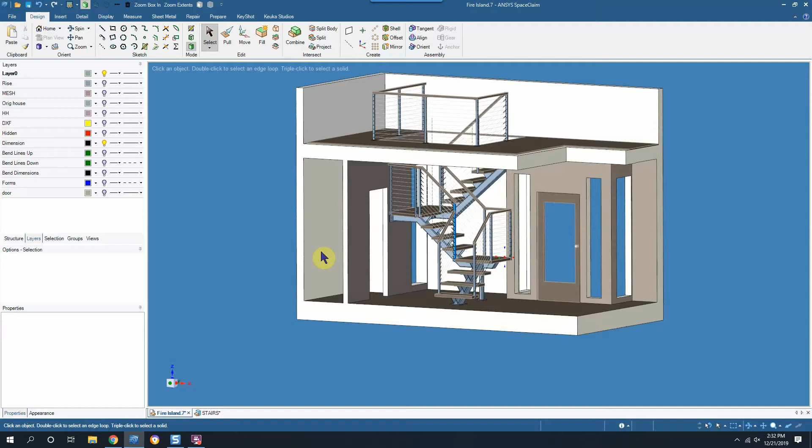Okay, this is a little quick fly through. I want to give you an overview of the stairs. I'll just start by flying around it a little bit. This is kind of what we would do if we did a real-time fly through, if that were able to pan out today.

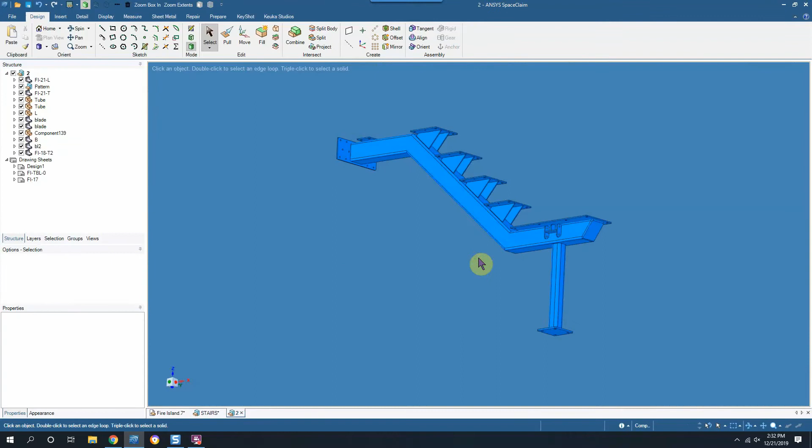So here's one of the main pieces. This will be like a welded unit. It's narrow enough to walk into the door. It probably weighs about 250 pounds. It's probably one of the heavier pieces.

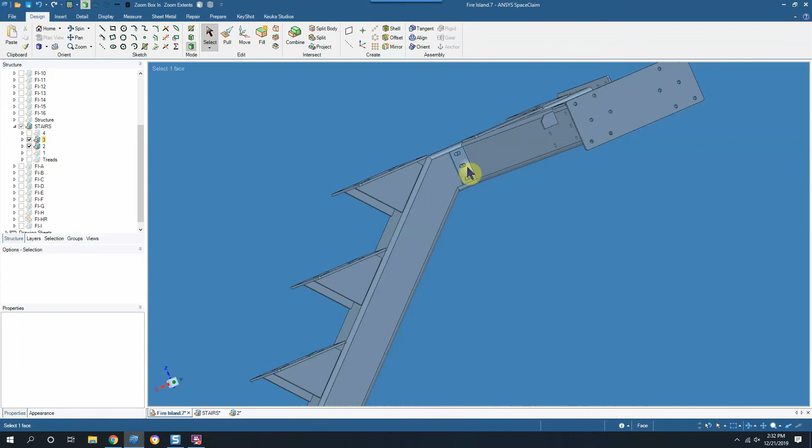Probably the first thing I would do is connect this cross arm here, and that bolts on with these little bolts right on this flange here. At least loosely connect that.

Then maybe connect this lower section here, which has some little tabs that this connects into, and there's a little hook on the top to line it up. Put the screws in there.

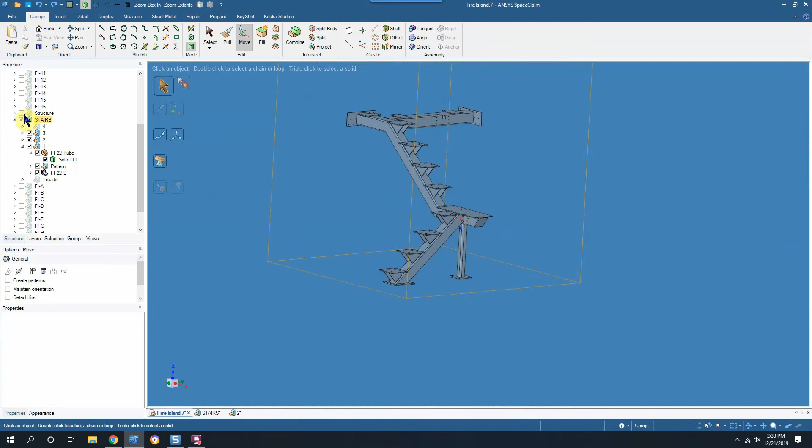Then you can probably set the thing up on the floor like this, lean it against this wall and this wall. We're going to talk about what you're going to put on this wall, because I've got this shown sunk into the wall a little bit right now, since Jeff mentioned that maybe that finished material was going to be removed, the shingles and something else put in, so I'll need to know what that thickness is.

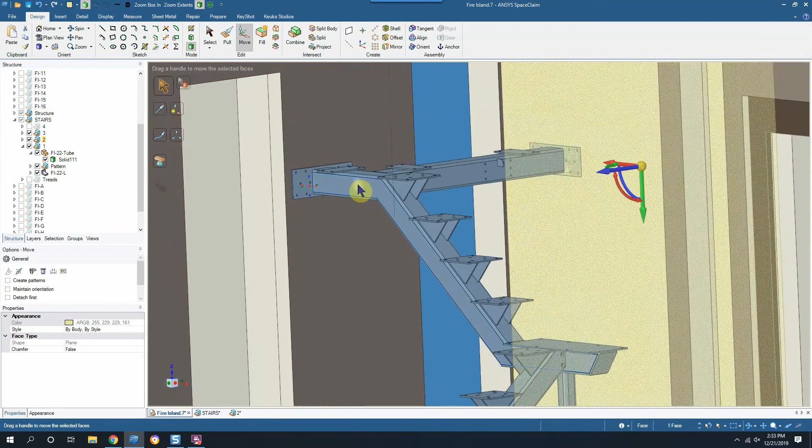Also going to assume that maybe you guys can put some blocking in wherever these plates mount to the wall, and some jack studs to help support the weight. But you could probably get this assembled to this point, maybe put a couple 2x4s underneath here, just to prop it up so it's sitting on the floor, but you still have a little room to move it around.

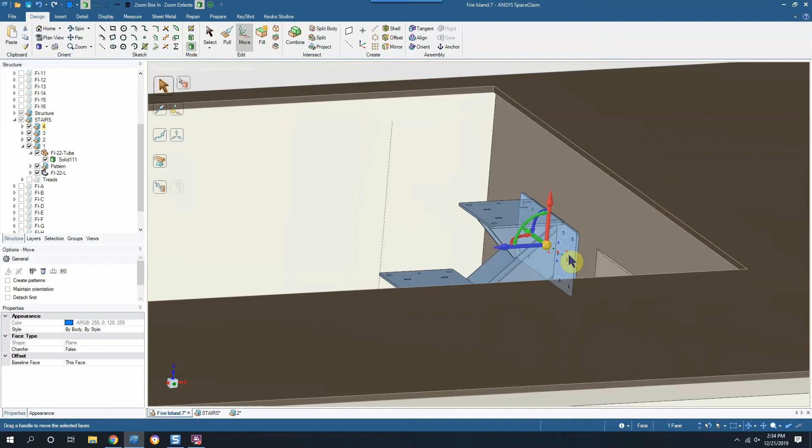And then this last piece up here is going to bolt into the front face of this wall. I'm a little concerned you've got a window here, and I don't know what kind of header there is there. If there's not a good header in there, then maybe this plate will have to be made bigger and have some holes mounted up here so we can pick up this ceiling joist running along here.

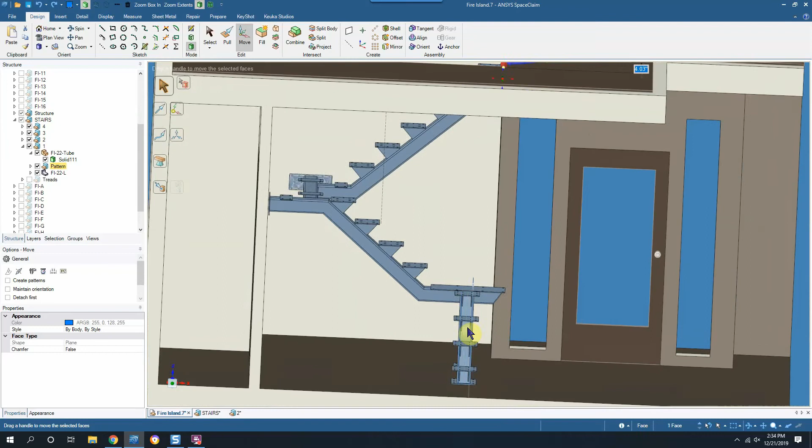Once you get it all in place and level everything up, then you can just lock it down and start adding the treads.

The treads will come up with little holes already in them, so you can just, and they'll be numbered so that you can screw them into the plates on the bottom of the stairs.

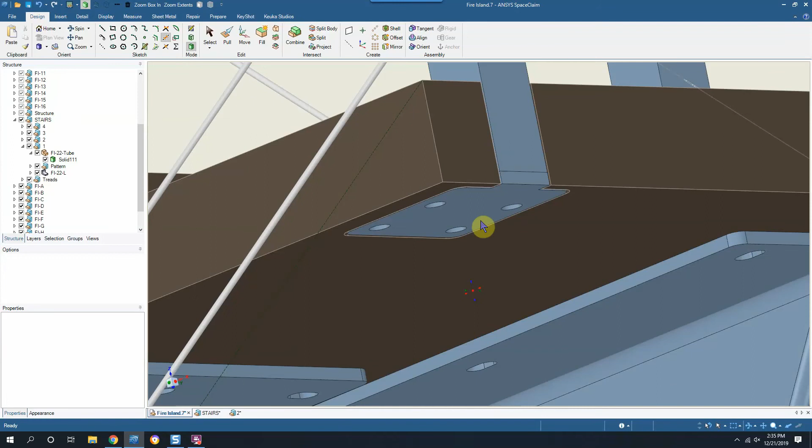All the railing posts will be numbered, and they have a little pocket that the bottom mounting plate fits into, so that helps locate those. And then the top rail just screws on.

We'll pre-assemble as many of these little turnbuckle fittings onto the posts as possible, pretty much all of them, and then you'll just have to connect up the cables, which we have a little video we can send you on how to do that. It's really simple. We've got a slick system that we created.

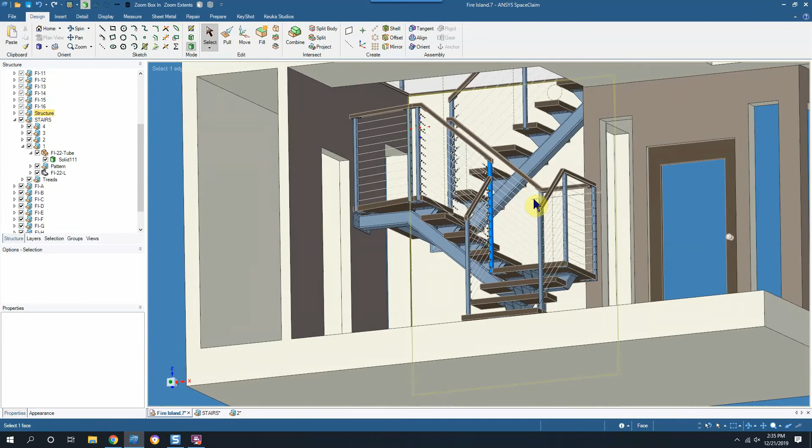That's roughly it as far as the assembly goes. We can go through this in more detail when we do a fly through real time.